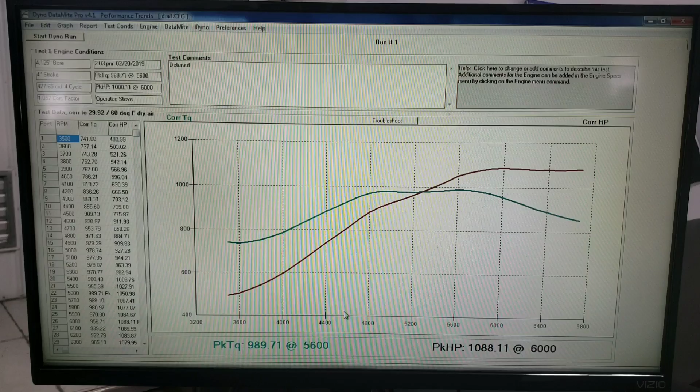I got one other thing to show you here which I think you might find interesting. This is on pump gas, 93 octane from just down the road, 91 doesn't really matter. At 3,500 we're at 741 torque, 493 horsepower. At 4,500, 909 foot-pounds of torque, 775 horsepower. At 5,500, 985, 1027. You can see the peak numbers here, 989 and 1,088.

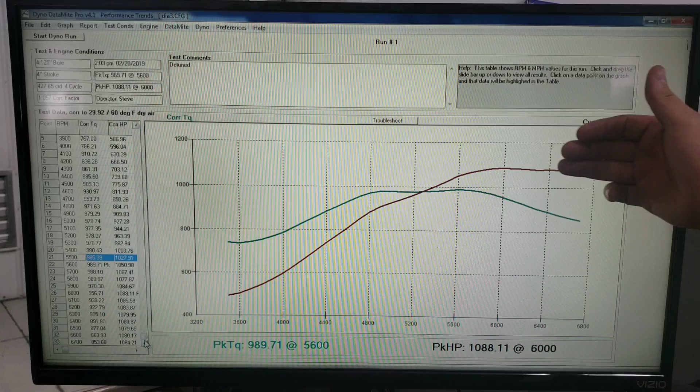Now you can see this is real common with a long runner manifold, which is what I was trying to figure out with that long cylindrical plenum area and this kind of a cross ram area. It's interesting, but they typically will not make peak horsepower. They'll lay over a little bit sooner and just kind of lay flat instead of continuing to rise up, so I didn't bother running it past 7,000 because it was laying over - I could hear it and feel it. That's really common from what I've experienced and what I know.

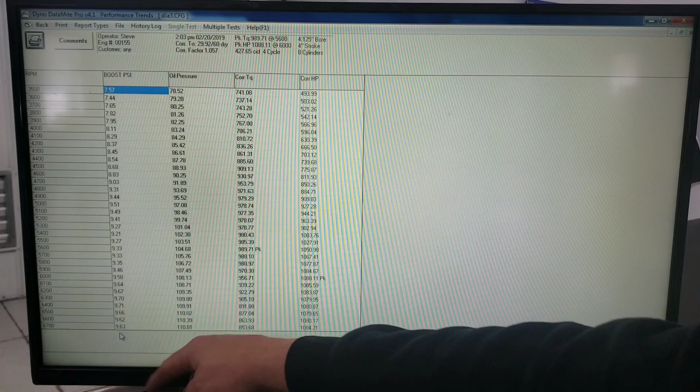Now we'll take a look at the boost, and our boost curve is nice, really flat, just 9 psi all the way across. That way I'm not manipulating the boost curve to make the engine horsepower any different, which we can do. I just wanted to show you a dead-on difference of what the horsepower curve would be with just a static base, flat boost curve.

So what I was going to show you here also, let's go back one and graph this out. Now if you see right here, this is detuned - that's what most people would normally set this up as. Detuned is safe, but there's always more left on the table if you do a really good job reading plugs, understand what the motor is about and what it's capable of, and you can tune these things differently.

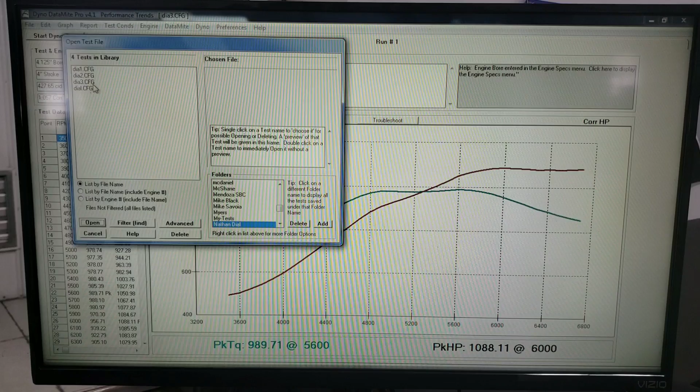So there we go, open - now this is the normal way that I would tune this engine. The normal way I tune most engines, I'm reading the spark plug, looking at it, don't give a crap what the numbers say. We're always looking for what kind of horsepower it makes, does the spark plug look happy, etc. So there's a lot of horsepower that's in the tune.

So sometimes there's naysayers out there that want to cry about, oh you guys make too much horsepower and all that other kind of stuff. Well, I can show you this thing just at this level, just 9 psi - let's go back here, I'll show you the boost on this one. 9, all the way right flat through there. But with just proper tuning and good tuning, where you're not just looking at numbers, not just being a keyboard jockey, and understand how the engines actually work...

We're looking at a peak torque of 1,012.49 and peak horsepower of 1129. So it's basically a 50 horsepower improvement on pump gas, same deal. This was just the pull before, and then I did a detune on it to show you what that would look like. You can see it does the same thing - the characteristic is exactly the same.

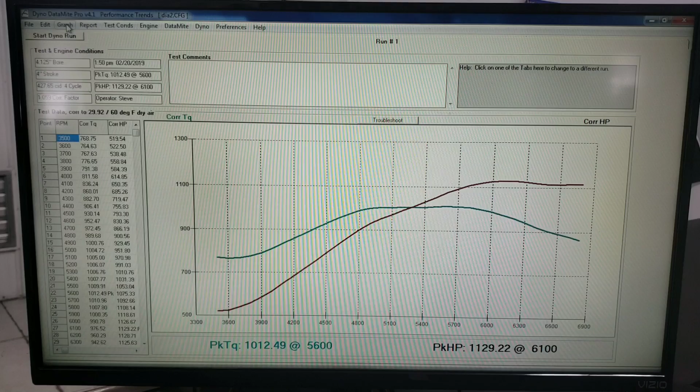And if we go back and even overlay them, let's see here - go back, and it's comparing something else. That's basically what it is, it's just down a little bit all over the place, but in particular up here at the higher RPM. So the green line is well tuned, and the red line is the normal tune you get out of a lot of people.

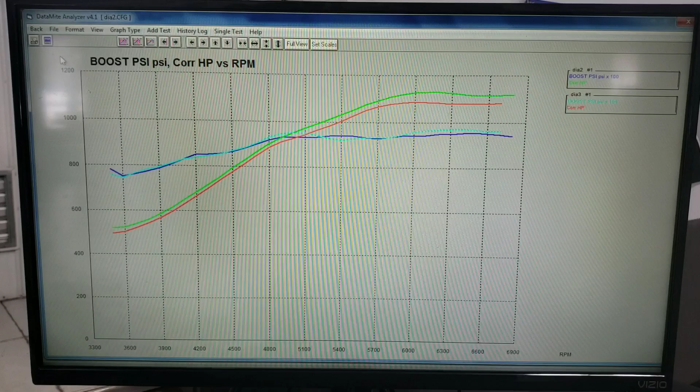But anyways, what I'm going to do now, that's just his street car tune, so just something he's going to drive it with. And now we're going to go ahead and put C16 in it and turn the wick up on this and make some more boost and get it more where he wants it to be.

It blew off one of the tubes right off of that left throttle body, so let me go fix that up. Alright, got that fixed.

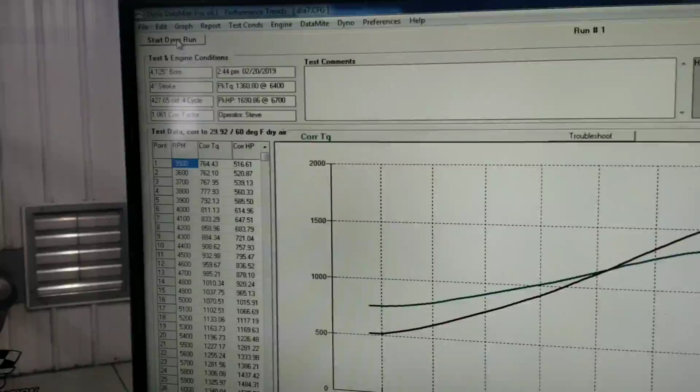Alright, now let's see what that looks like. Shrink that down - oops, sorry about that. There we go. Alright, now we had a grand total of 1690 at 6700.

You can see it kind of laying over there. We'll take a look at what the boost is doing, because I'm plowing a bunch of gate pressure at it to make it do that - it was only taking 5 pounds of gate pressure to make 9 psi. It took 15 pounds of gate pressure to make 15 psi. So we'll see where this is at here.

And it made 20 pounds of boost, which is cool, right up through there. So I know I got 23, 24 pounds of gate pressure to make that. The ratio is getting a little out there, but that's all right, not a real big deal. And so you see 20 pounds of boost.

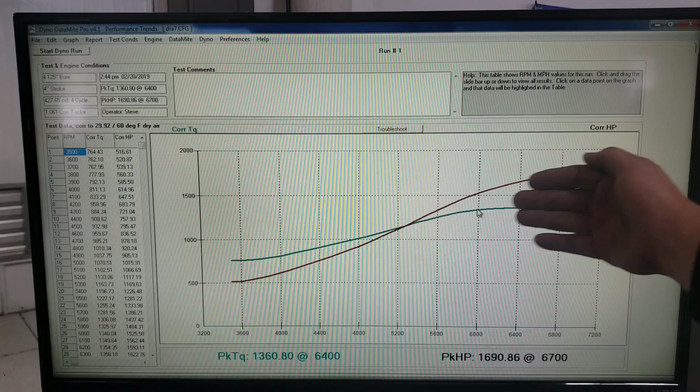And I was also really throwing it at it right at the very end too, right at the 7,000 - it was like 20 gate pressure, 20, 22, 23. So I was stepping it up, trying to manipulate this graph to look like this. But even out here, it's still going to just lay over unless I was continuing to just pour more and more to it. But this is a little more fair representation, as you can see with the boost curve there.

All the way from 6,300 to 7,000, it's 20 psi, pretty flat. Anyways, peak torque at 1360, which is right out there, mainly because I'm throwing a bunch of gate pressure at it. 6,400-ish right there, yeah, so looks real good.

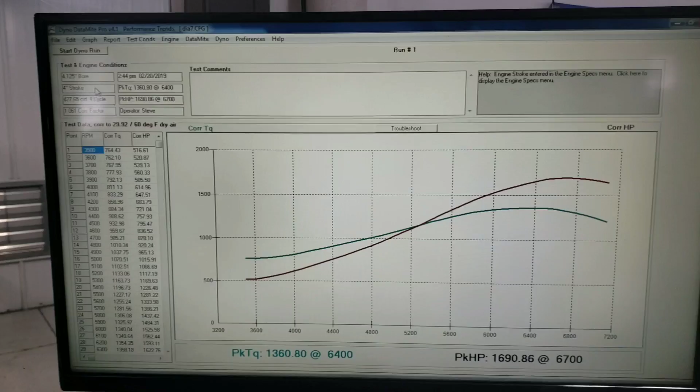I think we'll talk to Nathan and see how much more he wants to make with this. I know we can make a little bit more, so I think we'll probably go ahead and do that. And then I'll show you the next ones.